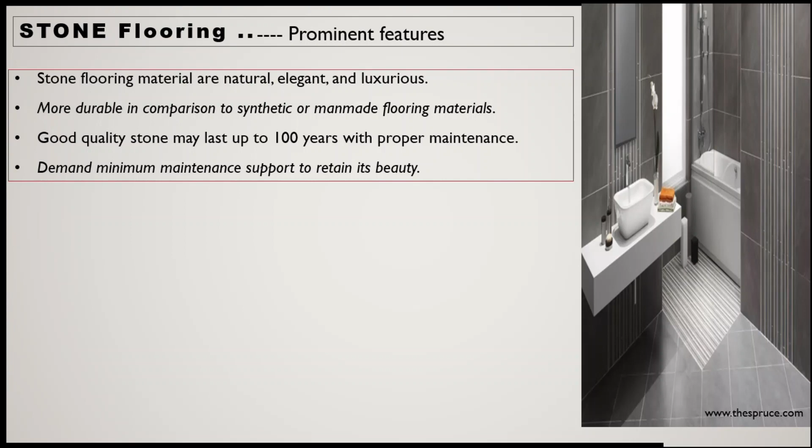Now let's look at the various types of stone flooring in the context of the Indian market. You are already informed about the various types of stones used in our houses and buildings - residential, commercial, apartments, etc., depending on the requirement.

If we talk about the easily available stones in the Indian market, they are granite, marble, limestone, slate, sandstone. All these are naturally produced through natural actions.

Now, whatever type of stone we talk about, they are all very hard in nature.

Skilled labor is required for the execution work to install the stone flooring. Efficient and skilled labor is required.

Stone possesses natural shades depending on its location of extraction - that means from which place you are extracting, whether Rajasthan, Kashmir, or any other place. So depending upon the location, you will find different types of natural shades of the stones.

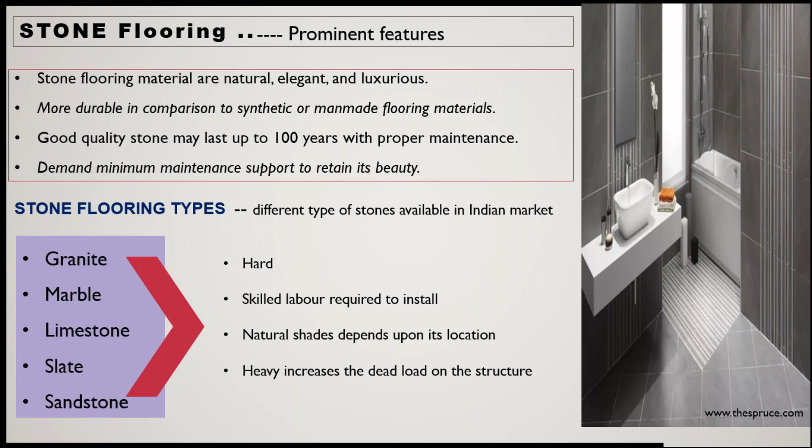Now, benefits of stone flooring. Yes, aesthetically it gives a very good appearance, good looking. That's why we are very much attracted towards using stone as a flooring material.

Every floor will give a unique look because every stone is a natural product, every stone is a unique product. They are not prepared in any industry or factory, so naturally prepared stone has very unique properties, unique features, unique outlook.

As already discussed, they give a natural appeal. They are non-polluting, eco-friendly, and reduce the adverse effect on the environment.

As we are already aware, if we are manufacturing concrete for flooring purposes, or producing tiles or any other commercially made product instead of stone as a flooring material, these will be associated with some pollution - some greenhouse gases may be produced. So they have an adverse effect on the environment.

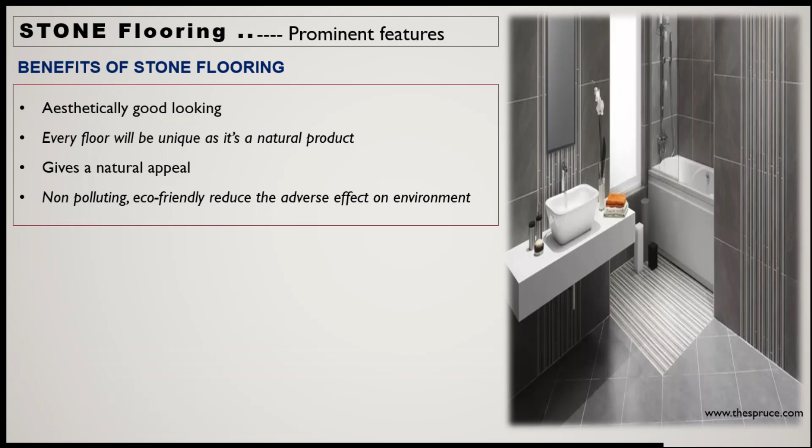When we use stone as a direct product, we just have to do finishing, cutting, etc. So minimum pollution is created with stones. Stone flooring is eco-friendly as compared to other types of flooring materials.

Some of the drawbacks associated with stone flooring: some stones are very brittle in nature. If we install these stones, some specific stones in the lot may be very brittle - that is one of the drawbacks of stones.

Except for granite and some slate, other natural stones are quite porous. Due to their porous nature, they require periodical treatment - they need to be treated even before installation, and frequent treatments may be required.

Some polished materials such as marble can scratch easily. So the stones are hard, but some of the properties of the stones are less user friendly or efficient for us as compared to tiles.

That's why sometimes we prefer tiles, but because of the better outlook as well as natural appearance, we generally prefer stone flooring. Another thing is its initial cost is very high.

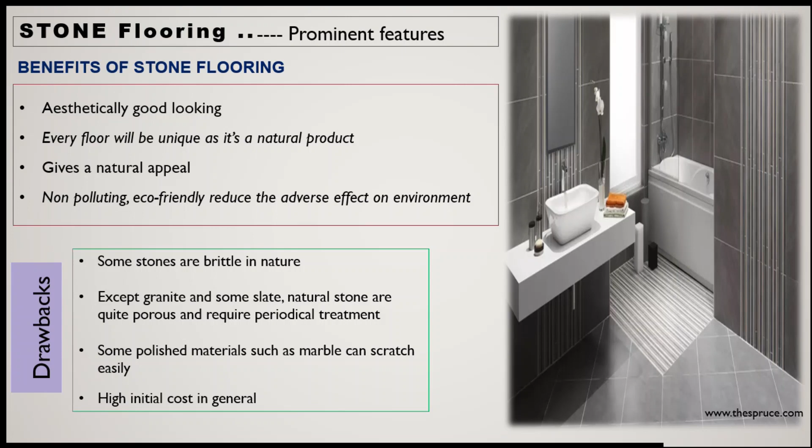In the type of stone flooring material, the very first is marble. You can see in the photograph, the marble piece looks very shining, very elegant, and very good for aesthetics, so everybody gets attracted to marble. So what are the features of marble flooring?

Marble stone is basically a metamorphic rock. After the finishing process is done, you can make the floor of the interior or exterior building wherever you require, and it will give a very elegant and attractive look.

No doubt, it is a very luxurious product depending upon the quality or different type of marbles and the grading of the marble, so its cost will vary. Commonly, marble is used in all types of building floors, not only a specific floor. If your budget is allowing, you can use marble in each type of floor in your complex or residential building.

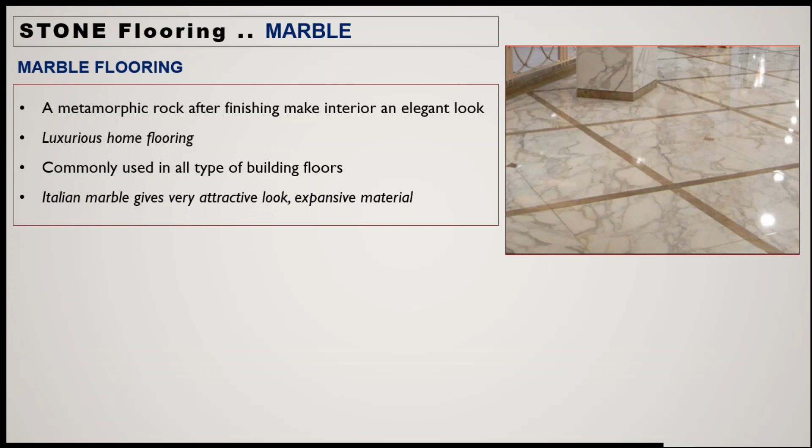You may have heard of Italian marble. It gives a very attractive look and is very expensive. Again, it depends on your budget. Depending on your budget, you can choose different types and grades of marble.

According to CPWD specification, they have put some marbles in this category which are very much popular in India.

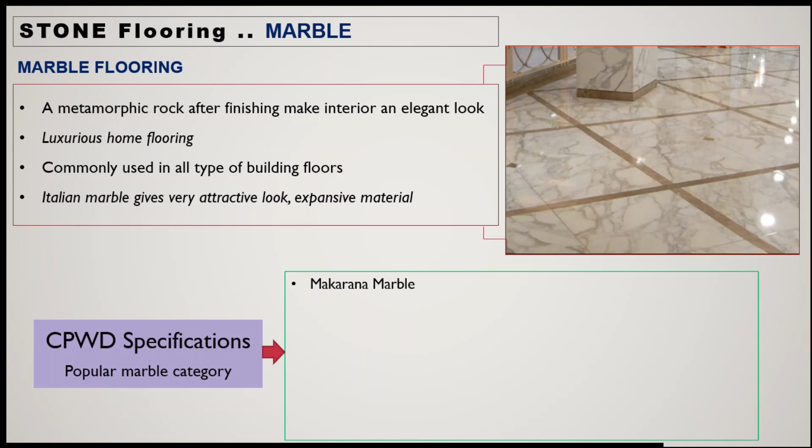Very first is Makrana marble, a very famous marble. Makrana is the name of the place from where it is extracted, so it is named after it. Similarly there is Ambaji green marble, Kesarayaji green marble, Rajnagar plain white, and Udaipur green marble.

So you will see that there are various types of marbles available in the market, whether based on their texture, their color, or their finishing. You will get different types of marbles.

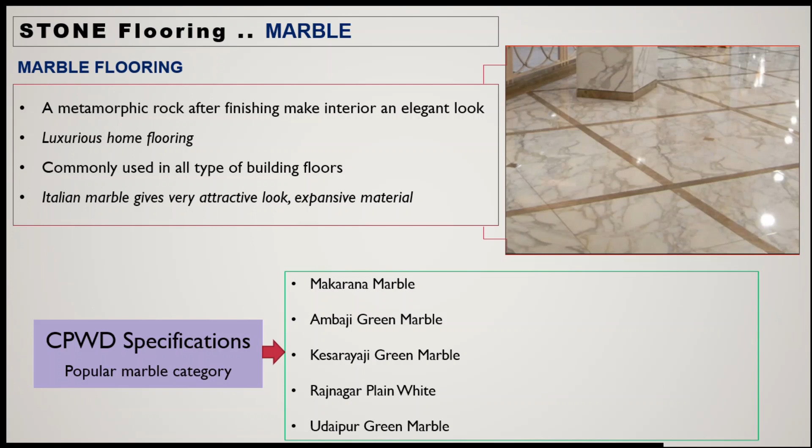Second type of stone flooring is when you use granite as a flooring material. Granite flooring will have a very good shining appearance. It is basically an igneous rock, a natural stone.

It does not feel as cold as marble. That means if you compare granite with marble, you will find marble has a better cooling effect compared to granite.

Granite is commonly used in the kitchen and surrounding areas. It can also be used in outdoor areas, driveways, stair steps, swimming pool sites, or other parts of the building based on your budget.

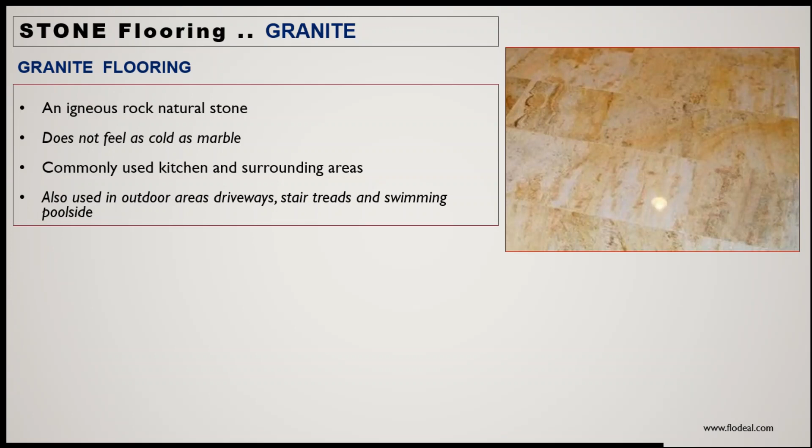Popular granite categories in India, in the context of the Indian market: you will find Jhansi red, Sindoori red, Baltic brown. This naming is based on the place as well as the color criteria.

Kashmir white granite, platinum white granite, absolute black granite - very attractive - and Rajasthan black granite. These are some of the popular granite categories in India. There are a number of other types of granite also available.

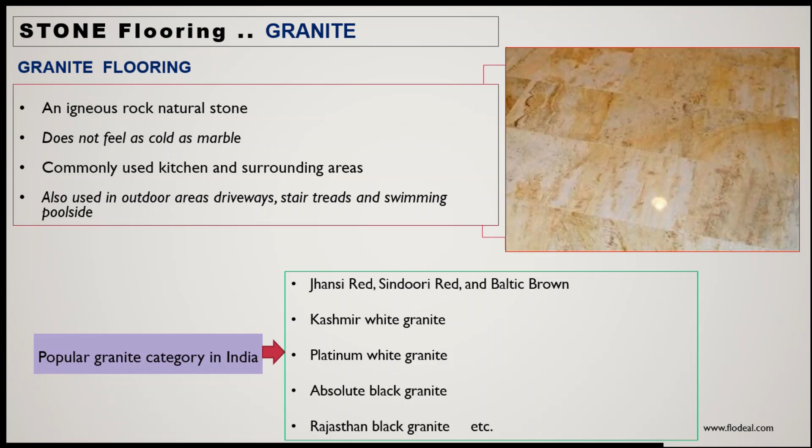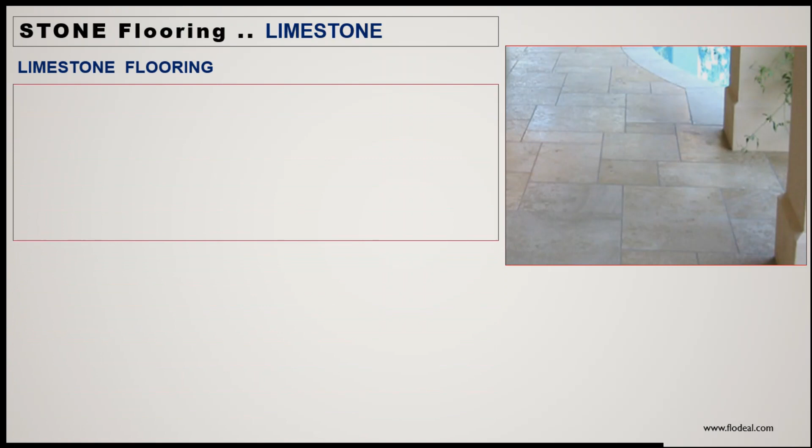Third one is limestone. Limestone flooring is basically a sedimentary rock material. It is naturally produced stone through the process of sedimentation, and sedimentary rocks are naturally prepared under very high pressure.

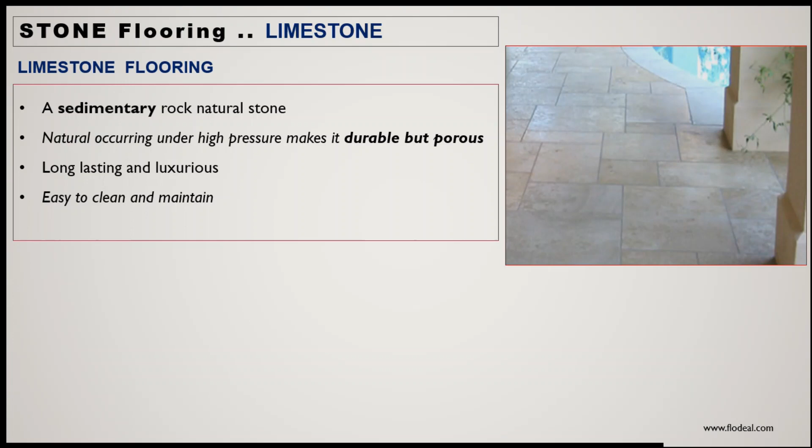That's why it is more durable, but contains some pores. It is long lasting and luxurious, and very easy to clean and maintain. So maintenance cost is very low in case of limestone as compared to others, and it is very much cost effective.

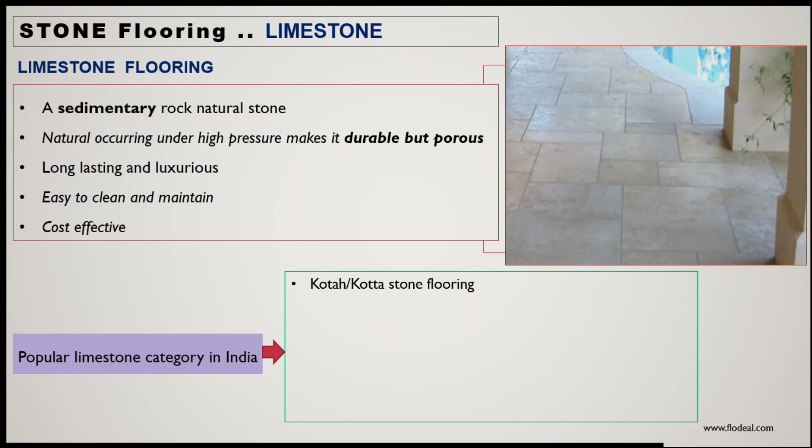Popular limestone category in India: Kota stone is very much famous. Kota stone is again of two types - one is polished Kota stone, which you can use in lobby, balcony, pathways. Then rough Kota stone - if the surface is rough, you can use it in the bathroom to avoid a slippery surface.

Then there is Travertine flooring. They are not good in stain resistance, which means their cleaning is difficult. You have to give more effort in cleaning.